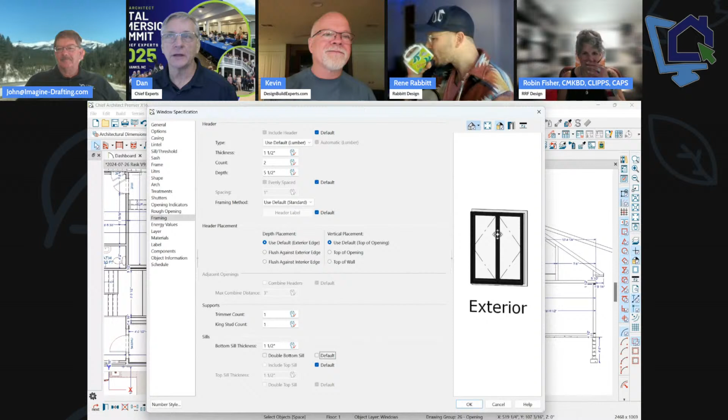So again, click on the window and then open it. No, huh, they're talking about the bottom of the wall, not the window sill. Well, excuse me.

That one I don't think you can do. Can we? You can't, I don't think you can change it. You can do a double, but you can't make it one 2x8 and one 2x6. Well, hold on, yeah, they wanted the double sill plate to be a 2x6, and then the upper sill to be, that's right, 2x8 and a 2x6, with the 2x6 flush on the inside.

Okay, you'd have to just do a CAD drawing, right? If it were me, I would actually do it manually, probably with a furring wall. What would be the purpose of that? What's the use case of having that situation? Yeah, that would be a good question. That was Designer X who asked that question. Designer X, what's the use case for that?

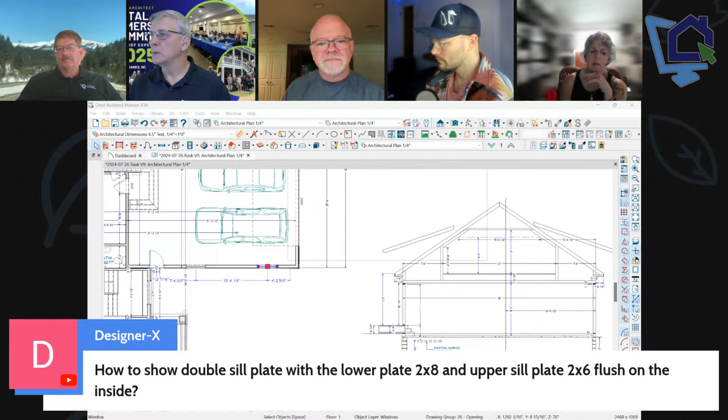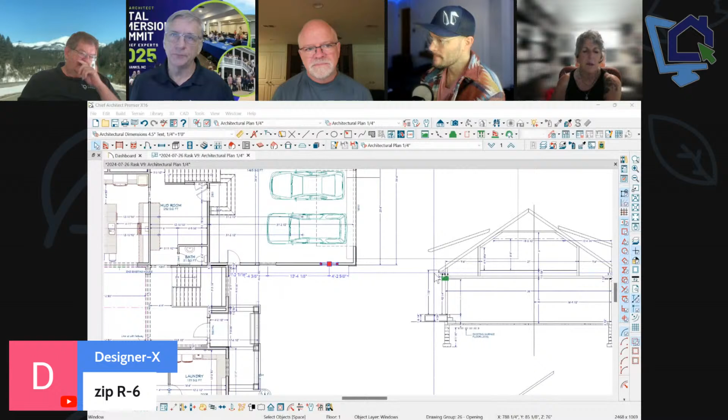Okay, explain to me what zip R6 is. I know R6 has got to be insulation, but what's a zip? That's a zip wall, zip sheathing. Oh, got it. What's the R6 for? That's the zip's insulation value, got to do with the foam. You can buy zip panels now with foam insulation already attached to them. Okay, so a zip panel that is an R6.

So he's looking to do a sill plate on the bottom. Well, let me just show you a way to do that, possibly. Could do a pony wall. Yeah, pony wall, that's what I'm thinking. Yeah, but if you just want to show that in your framing, you just click on a wall, open its dialog, and here's how I would do it, possibly, if I wanted to show it in 3D.

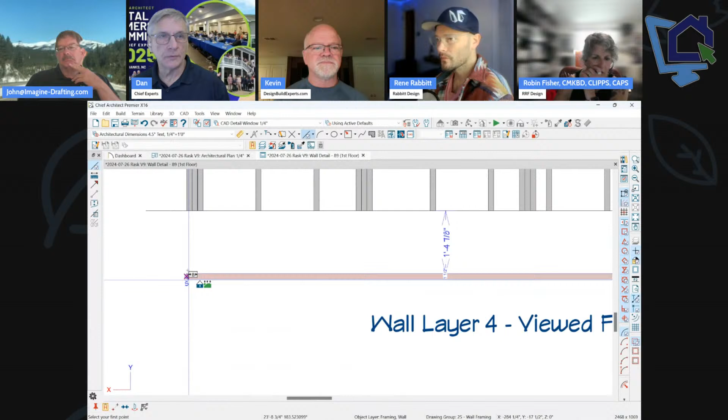I'm going to draw a line through here, and I'm going to trim out my studs here. Okay, I'm going to add another plate. Copy, oops, I missed my snap there. Again, this is the long way around, it's one wall at a time. You could click that bottom wall then and make it a 2x8.

Okay, just by changing it. And then I'm just going to extend my stud, delete that line and extend my studs back down. So it's a way to do it. It's manual, it's not super easy, but I'll set up a way to do this and could show it in a little bit if you want to.

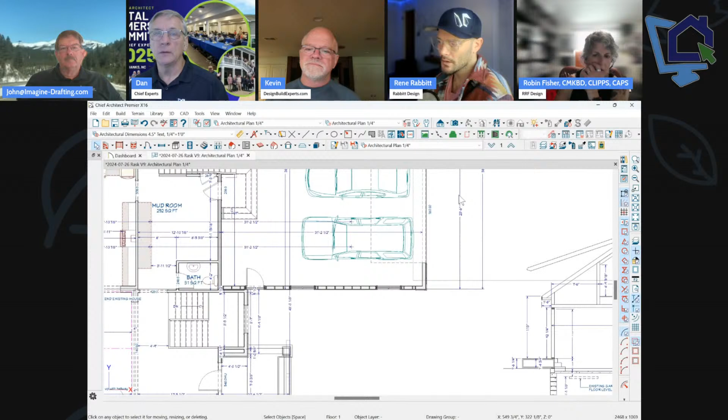But let's see if it worked. Yeah, so there's my plate. My plate's centered on the thing, so I would need to adjust that. I need to do the X, Y one way or the other. Once I calculate that, it wouldn't be hard to do, and I would have to move it over half of the distance of the plate.

I'm assuming you're wanting to do the plate because you want your zip panel with the sheathing to rest on the 2x8 and then nail at the bottom here. That's what I'm assuming. His last comment defines that, and that is correct, he wants the zip to sit on that plate. So that would be a way to do it, and then it would be part of your cross section when you add that to your sections through your model.

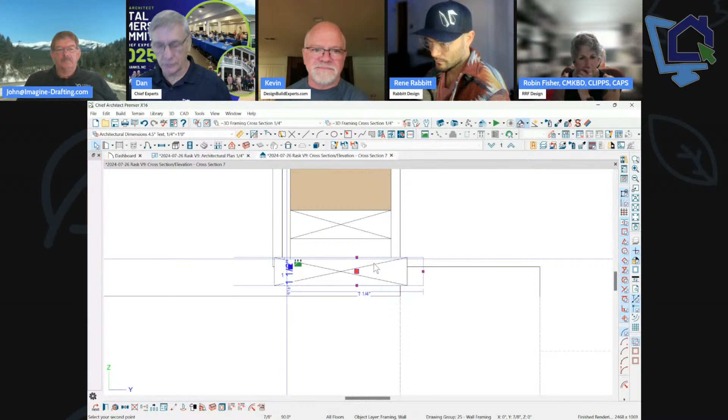So I got it right now. Probably move it right here too. So the nice thing about, I'll do it the other way, like this. So now that's going to be sticking on the right side, and your sheathing would rest on top of that. Anyway, okay Rene, have at it.

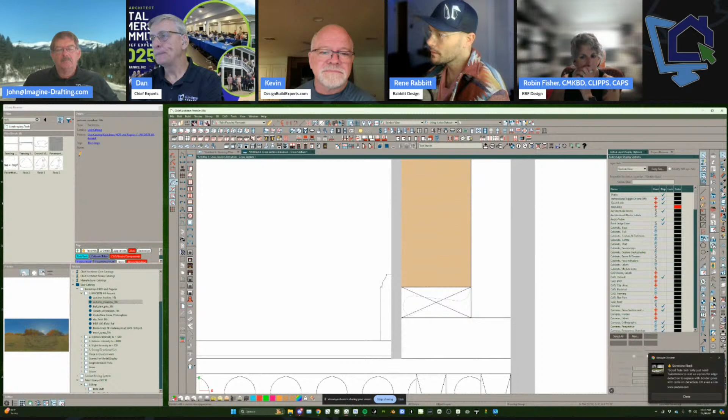Show us what your solution would be. I just have a pony wall here, and you got to get rid of the little insulation cross box because it's going to show that this is insulated. But the pony wall is only 1.5 inches tall, so all I did was add that 2 inches, assuming 2 inches of zip wall plus whatever this pony wall is. Now it didn't auto do a cross box, that might be because I didn't get it right on the money, but the model is actually built this way now. There you go, show the 3D of what the pony wall looks like.

Just show people how you made the pony wall for those that don't know how to do pony walls. So that's over one of these, I'm not sure which one I did it on.

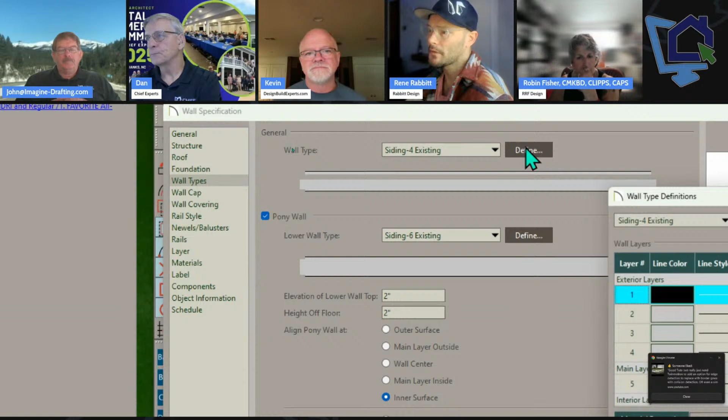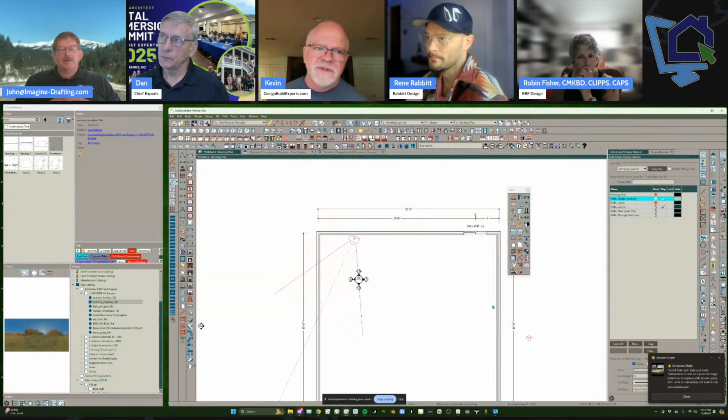So I opened up a wall, and in the wall types panel, designated it as a pony wall, then went in to define my upper wall. I redefined the upper wall and dropped in a 2-inch insulation air gap. Make that a framing wall, make that a frame - that's the zip wall. And then the wall below it is 2 inches wider, that's the 2x6. So that's a 2x6 wall plus a 2x4 wall on top with the zip sheathing, and they are the same thickness so they will align. So I just made it, and made it 1.5 inches tall.

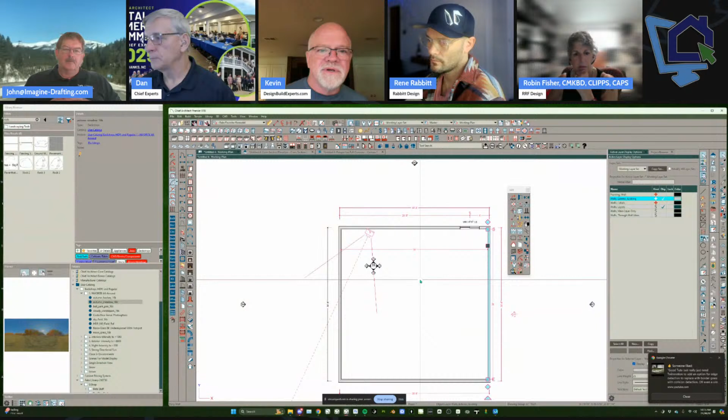Yeah, so I have another way that also makes use of a pony wall, but you could also simply make a pony wall where the bottom part of the wall was only 1.5 inches tall. Make your wall 8 inches wide, make the upper portion of the pony wall 8 inches wide, and the zip is the exterior layer of that. So you've created an 8-inch wide wall with the zip sitting on top of an 8-inch wide wall that is only 1.5 inches tall. That's what I did.

Same thing, except now you have that wall built that way for all pony walls. Rene, put it in your library and pull it from the library to draw it instead of from the wall tool. Done - you call it the zip R6 wall. Will that only save the top wall, won't save the bottom? Oh, do you still have to designate a pony wall? Oh no, you're right, it does come in as a pony wall - saves the whole thing.

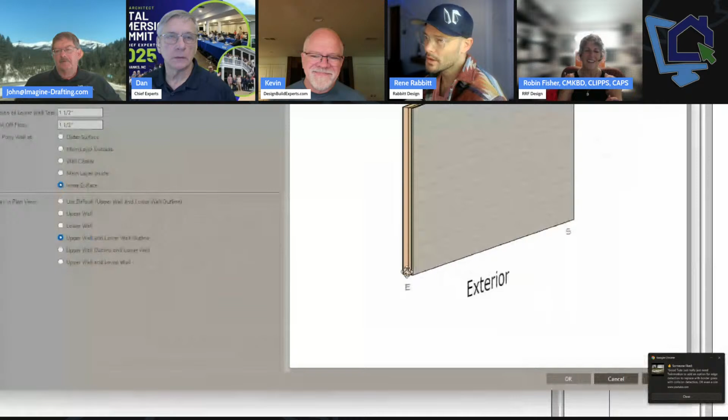Cool, there you go, look at that. You guys are amazing. It even shows it in this little preview, right? That's worth at least... how much is that worth? Man, that's worth a lot. You need to get those tricks at the summit. I have a question about this zip sheathing.

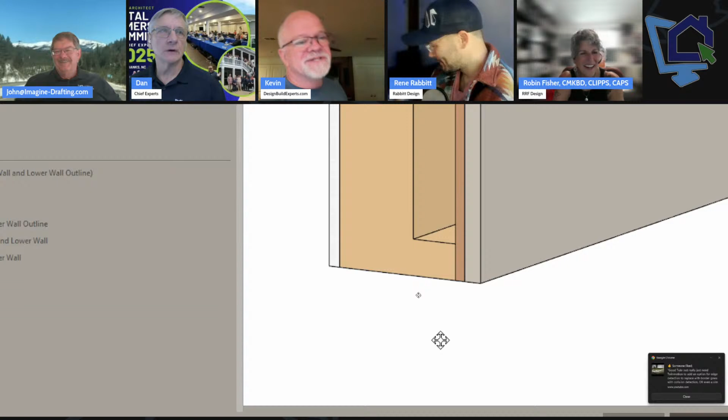You can show my screen here. So again, these panels are now coming with the insulation attached to the zip sheet. The zip sheathing is the coated OSB that's got the air barrier on it already, and then they have different thicknesses of the insulation.

I'd love to know how that compares in cost to put that on versus just a 2x4 wall, because I got a client that's asking for 2x4 framing with the R6 zip. I understand the benefits of the zip panel, as far as that a lot of times you get thermal bridging through the stud, and this breaks that. So I get the benefits of it, I'm just curious how the cost would compare.

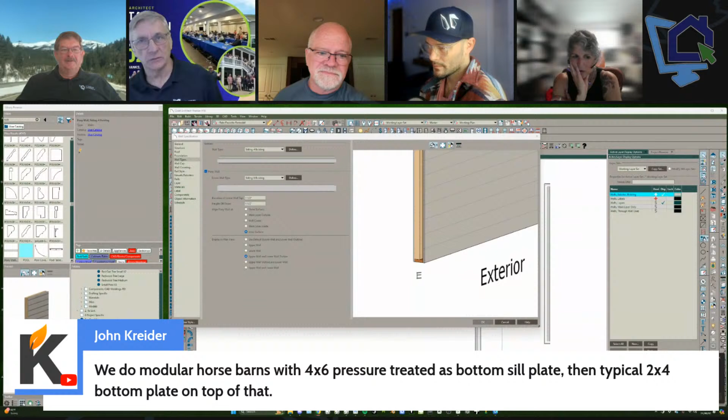I like that. I looked up some pricing on those sheets the other day. How much does a sheet cost? That's what I would like to know. I'd have to look, with the R6 on it. I found some price like $90 a sheet, something like that. And it seemed a little... But you have to compare that to the sheet of insulation, the sheet of OSB, the sheet of air barrier, everything total. Well, I was comparing it to 2x4 with the ZIP and the foam versus just 2x6 with OSB. That's kind of how I was looking at it.

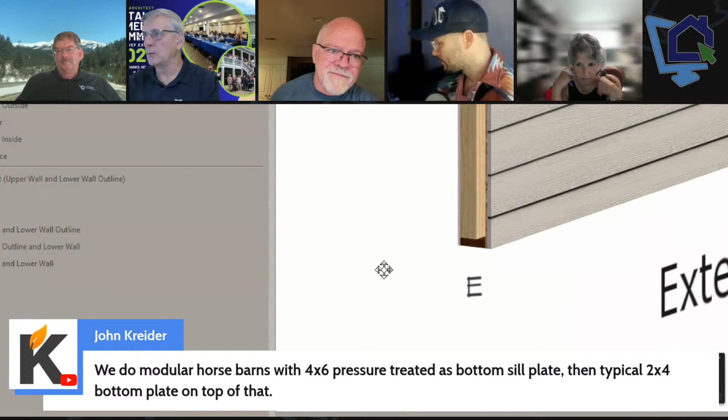So I understand what you're saying. Well, then you have the labor of installing each one of those things independently. Exactly. Erin makes a really good point. She says only one trip around the perimeter with the scaffolding. Right. Scaffolding is a nightmare putting up and down. It takes so much time to do it. Okay, so $87, so it's not too far off. Yeah. And to me, once I did it on the first house, it was a no-brainer. From that point on, everything was done that way.

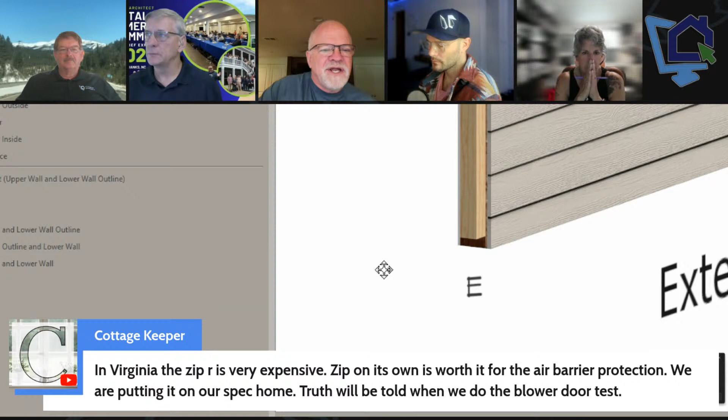So did you do the 2x4 with the R6 ZIP? No, that didn't exist. Oh, okay. I did it with the ZIP, but I was still doing the insulation on the interior. Now with the new energy codes, it makes complete sense, because we have to build up that exterior R value to the point that you've got to have a pretty thick wall to make that happen. Yeah. Cool.

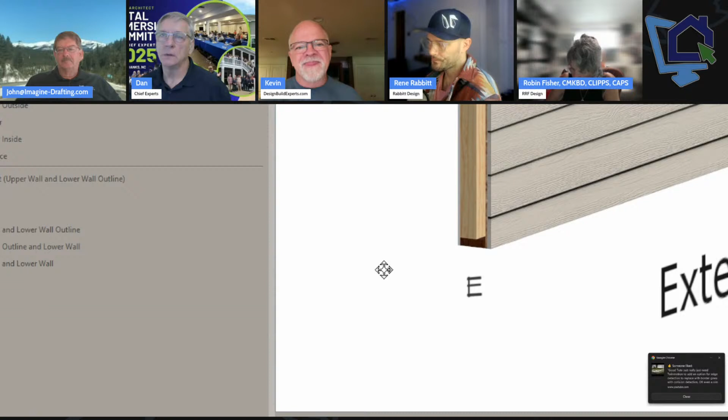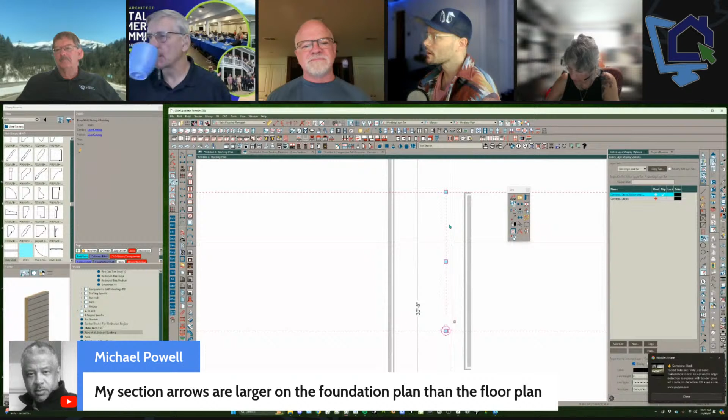Got a question here from Michael Powell in the comments. Section arrows are larger on the foundation plan than the floor plan. Why are my section arrows larger? That's going to be from the text style, I would assume, of the cross section. So this guy right here, camera's cross sections, foundation plan, camera's cross sections. It may also have to do with the text style.

You're just repeating me today, huh? Yeah, well, I revere you, so it's important. What is it? Imitation is the best form of flattery, right? That's right.

So you can override this. First thing to check is if your text style is different on your foundation plan than your other plan view, which is coming from your layer set. Your layer sets are designating that. And then the other thing is maybe you overrode the text style for this, in the plan display panel, I think.

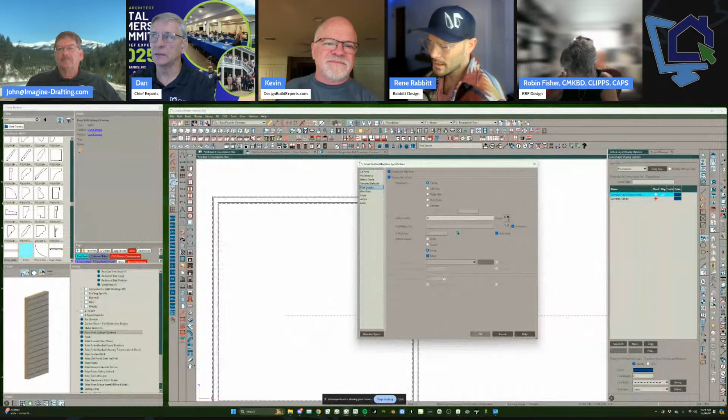I'm using the same plan view for foundation and the other elevations. If you're using different plan views, that could change the text style. If you overrode it, it would be overwritten in every layer set. Somebody said that earlier. Okay, children.

All right, what else you got? Oh my goodness. Margaret's wondering if we finished going over the X16 stuff. No, we haven't. We still have like, I don't know, 15 more to go. At the rate we were going, we could be going the rest of the year. Yeah, we'll do the X16s till the X17s come out. Well, let me review where we were at with that, since I'm the one that does the scheduling, and then we'll decide what else to do on that.

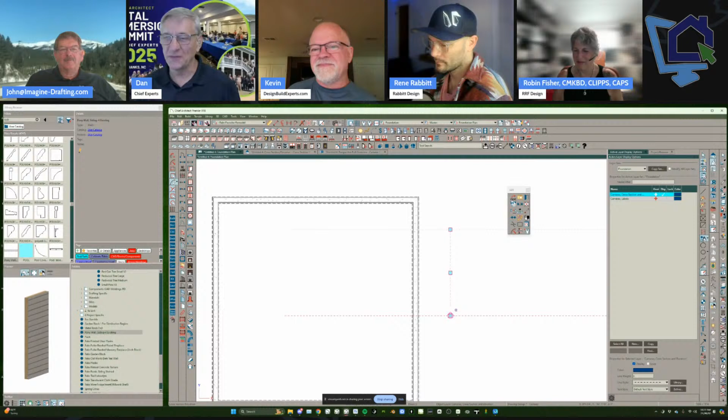But the problem was, when you guys were gone, we went off on a really long tangent. That's what I heard. We dove into rendering really good. It was great. Didn't have John there to cut us off.

I got a question. You guys chime in anytime if someone asks questions, but let me throw out a topic here. How many of you do this sort of stuff before you model your building? Actually draw the cross section before you try to model. It's a lot easier to do that. I've done it. Oh, can you show my screen, John? I got you. Oh, you're showing your screen. Yeah, thanks.

So I do that when I'm doing remodels because I have to. It's the only way to get your dimensions correct. Yeah, and how many people on the call do this, where they actually just use the CAD tools and you're just drawing a 2D CAD drawing of what it is you want to model? I do this a lot on my projects because it's the easiest way. Why do you do this? So I know what to model.

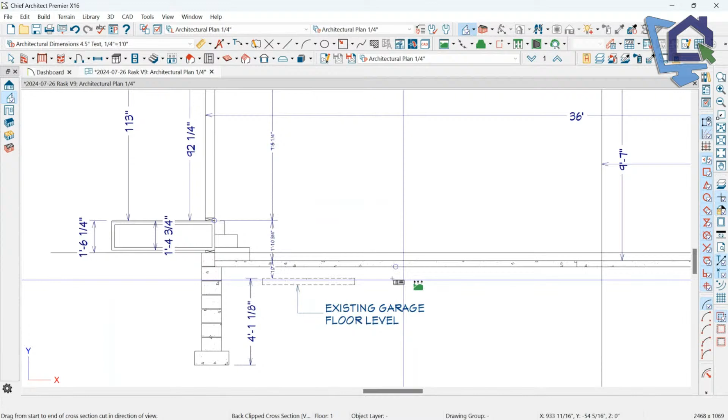Okay, so when I do this, here's my zero floor height right here. So I know exactly what to put my floor height at. I know where my stem wall height is at. I know what my ceiling height should be. I know where my fascia height should be for my roof. I know how much headroom. It takes all the guesswork out of messing around with 3D modeling to try to get everything the way you want it.

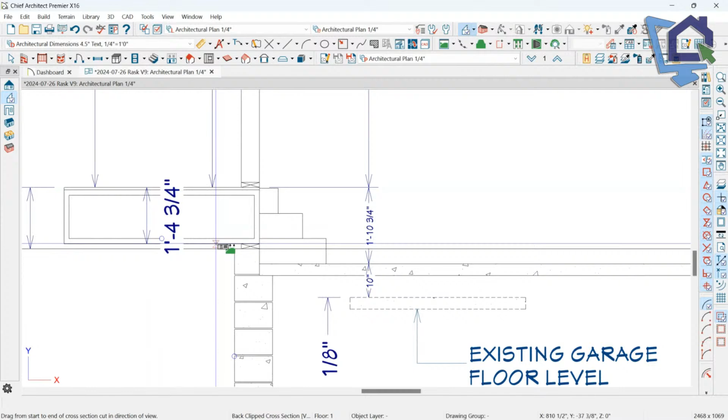Why wouldn't you just be plugging that into your floor defaults? Into what? Your floor defaults. Because I don't know what it needs to be to plug in. How do I know I need 1 foot 10 3/4 inches from zero to the top of the concrete? Well, where are you getting this from? That number would come from my floor joist, my truss thickness, sill plate, the height of the concrete block or the foundation walls.

Are we talking new construction or remodel? Well, this is new construction. They're basically removing the old house. So you're mapping it out essentially. Yeah, pretty much. You're not doing it for the whole house, you're doing it to get the critical measurements. Yeah, and once I get all my critical dimensions in place, I will then pull my cross sections through my model, because I can add the framing to this model super easy. It just really works for me. I've done this for years, always when I'm trying to do a remodel.

I'm with Ethan on this. Why not just model it? I also don't know what to model. How do I know that this height here needs to be what it needs to be when I need 113 inch? Or how do I know what my fascia height is?

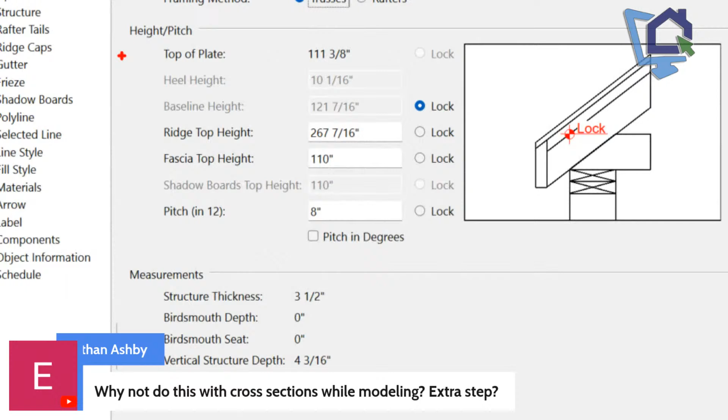Although I will say one thing they added in X16, which is fabulous, is this one setting in the roof dialog that tells you your heel height. This is so freaking cool. I was part of that thread on Chief Talk that was like a brute force thread. Like, give us this or we quit. Yeah, when I noticed that in X16, I almost jumped up and down in my chair, because that is such a valuable piece of information.

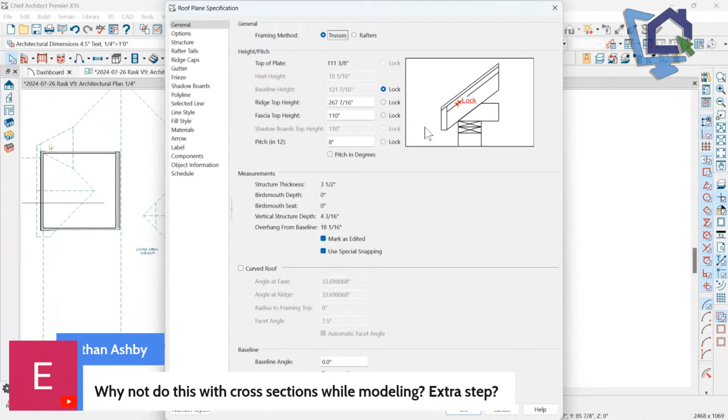Because I would always have to draw my cross section to figure out my fascia height when I needed a specific heel height. Now it's right there. So that will eliminate a lot of that guesswork, or me drawing that kind of stuff. So anyway, I just thought I'd throw this topic out there because it's something I've done for a long time, and it really works for me.

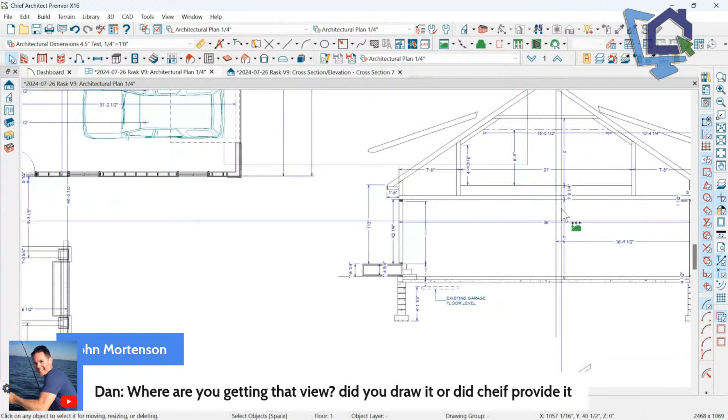So John, this is a CAD detail that Dan drew that he's showing there. Yeah, as I'm drawing this project, I'm doing this. And the other reason I'm doing this is because this is like the 4th time now that we've changed the garage and how they want to do it. Yes, they want living above. No, they want bonus above. No, they don't. Now they want to make a bigger dormer off the edge to do bedrooms up there. And so it's just part of the whole process of working your plan through. I'm up to version 9 in this particular layout for this project.

Interesting project too, because these people bought this house on a beautiful lot on a little lake here in the Twin Cities, and their house is about like this right now. This is existing. This is going to be new. They're going to live in this while I build this, and then they're going to live in this while they tear this down and build this. I'm designing around a critical wall element here. But anyway, regardless of that, fun project to design. We're just taking our time and getting it the way they want it. So it's just kind of fun.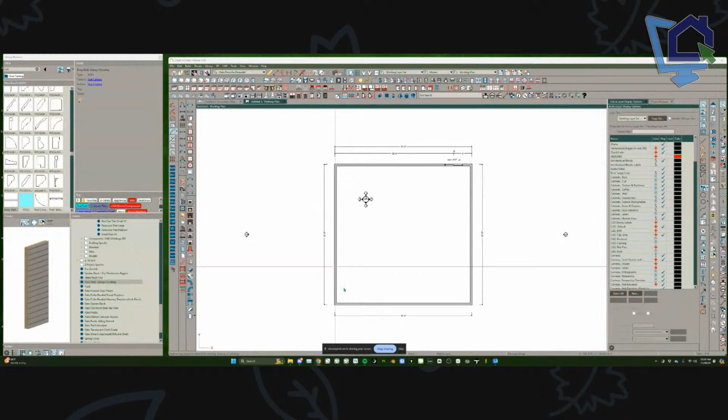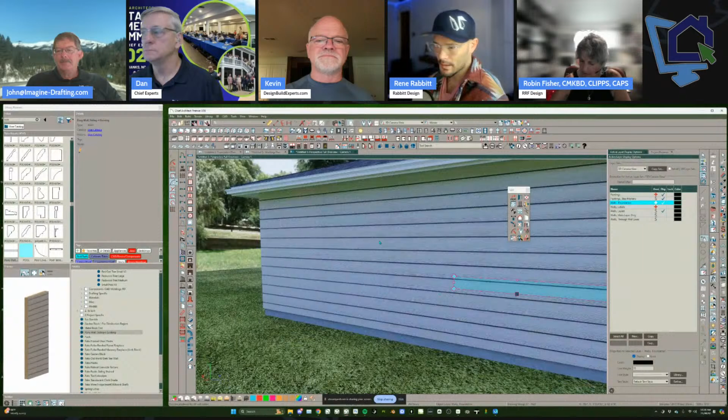Can I redress this? Let's see. I'm just curious in people's opinions. So here's what this would be, and we could stick our faces back on the screen if we want. To me, I think I'm maybe a little unique in that I do a lot of work in 3D. So maybe that's why this works really well for me. You had 1 foot 4.5. I have 4 walls in here for a number of different reasons. This is my template plan. It just comes with 4 walls established, which is establishing a building. So I know off the bat that this is here.

And part of that is that when I'm coming in a project and I need to build a garage. Let's just say I'm going to turn this room into a garage, because that's what you were showing, right? I think. Yeah. And then I already know that this is a 1 foot 9 setup. So I can come in here into this room and then bring this up 5 inches. So that's my first part. That turns off auto build foundation. Next part is you had a different heel height. So I'm just going to come in to build roof and change that heel height.

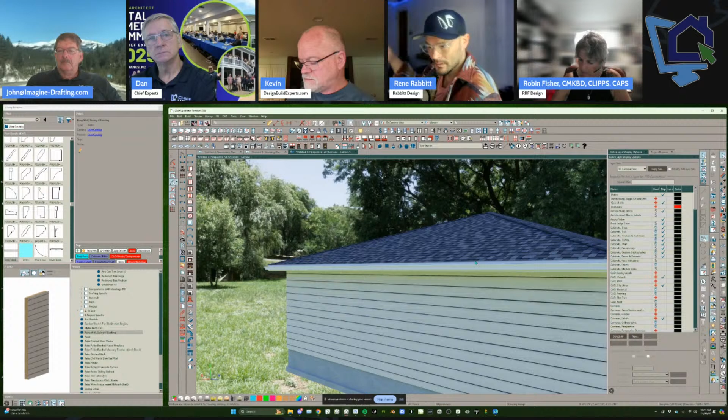Right. So this is very fast to me versus CAD seems a lot slower to me. So that's why I'm wondering what the difference is. I think it's just that I see it differently. Like I can see this, it's very clear. Your diagram's super clear and it's a great reference point, right? Yeah. But I might just save this by itself as my reference point. It's like, hey, if nothing else, come back to this.

I'd say probably about 50% of the types of projects I do that have, not difficult, but a lot of things going on, excuse my term there. It's just easier for me to organize my thought process if I put it on the screen and I have it right there. Gotcha. Totally understand that.

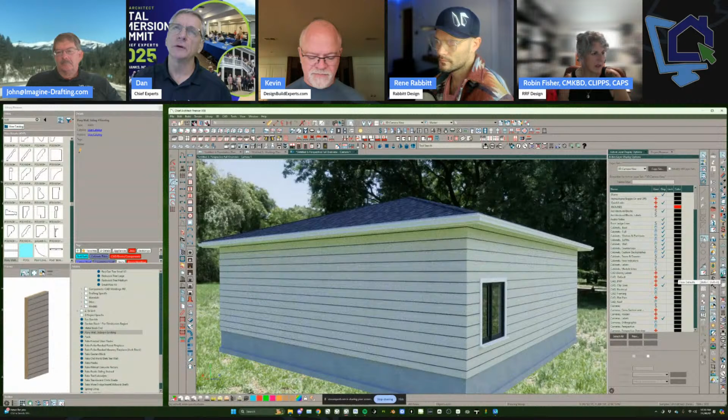I think reverting back to a conversation we were having earlier about the young lady that's struggling in your class because she can't stay focused. Sometimes I think some of that not being able to stay focused comes from total lack of understanding of what to draw. Not how to draw it, but what to draw. Absolutely. Right. And I run into that too. So I don't necessarily know what to draw. So if I take a little time and slow down and do what I do with these cross-section things, it helps me clarify what I need to draw. Well, and okay.

The issue is that there's a lot of really advanced builders on this call and in this room, and then there are people who are not really advanced. Like I'm not a builder, right? I don't do house construction, and it's easier for me to go through the exercise that you talk about, Dan, so that way I can actually understand what I'm creating. Yeah. Because I'm not really experienced in that.

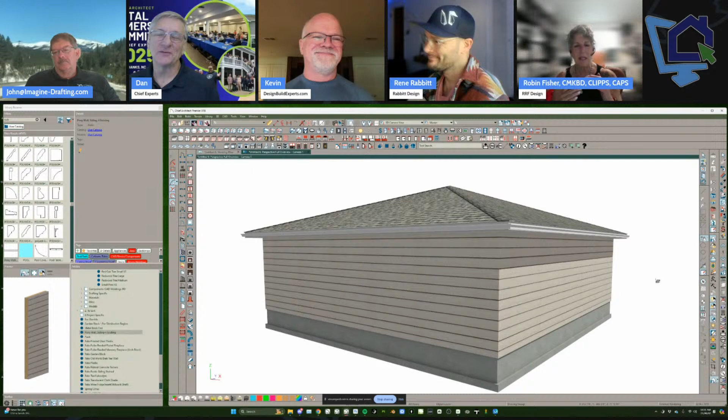Some of these people who are on the call and you guys in the room are really experienced, and it's easy for you, especially Rene. I mean, your brain works differently than the rest of us. We all know that, okay? I say that lovingly, but yes, his brain vibrates at a higher level than the rest of us. We already know this about Rene. But you haven't seen my outtake videos. No, I haven't. But you did actually admit that you were human recently, so that was good to know. Yeah, when I was choking on a recording.

Exactly. So sometimes doing a rough drawing is really good for people to do, and I really recommend it, especially for beginners, to sketch it out if you don't quite understand what's going to happen. Some people don't understand once you put it in 3D or get in the plan. You're like, I have no clue what I just drew, right? So I want to show a couple things real quick because I was kind of in that mode.

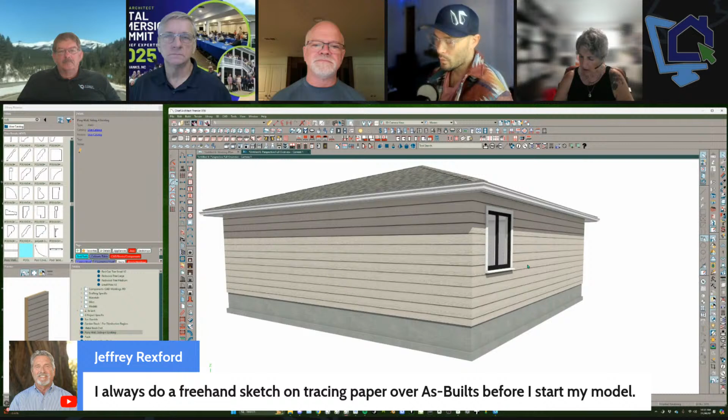If people are a little bit newer to this software, floor defaults drive all of your structural setups for every room on the entire floor. So if you're someone that is designating individual rooms' structure and heights, I would encourage you to instead change your floor defaults, and it will automatically change the heights of all the rooms on that floor. So if I have a floor where one room is 9-foot ceilings and the rest are 8-foot ceilings, make sure floor defaults are 8-foot ceilings, and then just change the one room to that 9-foot ceiling.

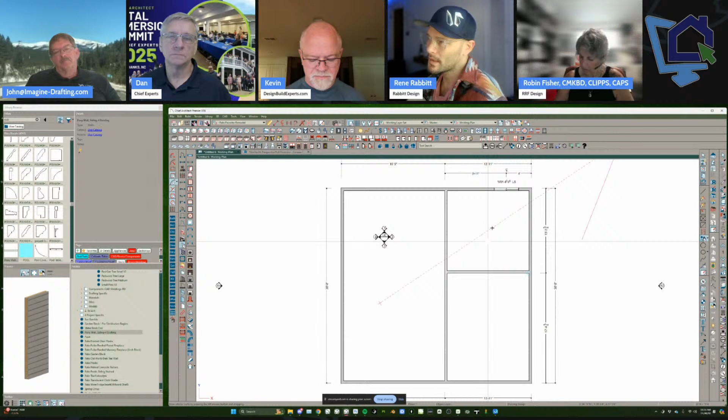Exactly. And if you do want to try working in 3D and give it a shot, I'm going to show you a workflow for this. Here I've created a couple dividing rooms, where these two rooms are going to be 8-foot ceilings, and this room is going to be 9-foot ceilings. Or actually, let's do the inverse. These two are going to be 9 foot. This one's going to be 8 foot. So I want my floor default to be 9 feet. I know my template plan has an 8-foot ceiling.

So I get into edit default settings, floors and rooms, and it shows me floor levels. And then here's my first floor defaults. This dialog looks a lot like the structure panel on a room dialog box. Yep, it's the same panel. And here's where I can just hit +12, and that will get me my 9-foot ceiling. Instead of this, I'm going to show you another way in 3D.

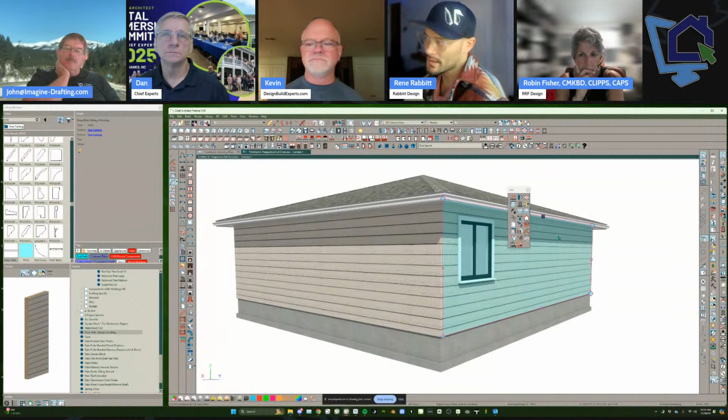I can click on this. This selects the wall. If I hit tab or enter, it now selects what's called the exterior room. It's going to give you this edit handle here, and down at the bottom it should give you another edit handle. That's just for the floor below.

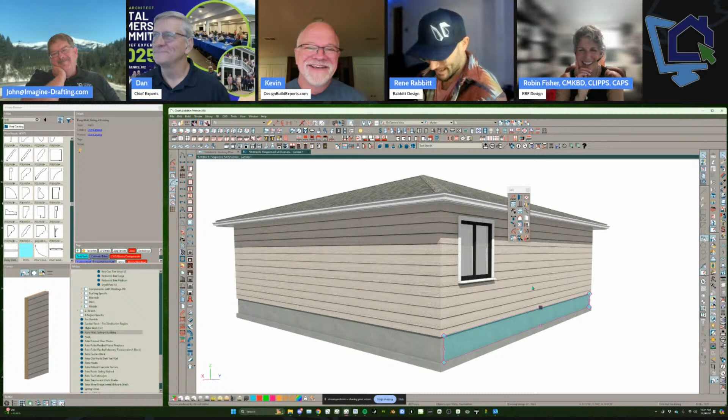Oh, excuse me. There's a spider right in front of my screen. It's going to land right on my keyboard. Oh, he's going back up. Okay. See you later. You didn't think about taking him outside, huh?

If I tab through this and drag this edit handle up, you're going to notice the entire structure looks like it's moving up. It is. It's changing the floor default. Right. So very quickly, while I'm dragging this cursor up, I can hit tab or enter and put in 12 inches. I've now changed the entire floor default for this floor to 9 feet. We can confirm it. Do you have the ability to hold the roof in place at the same time? It's just auto building off of that new plate height.

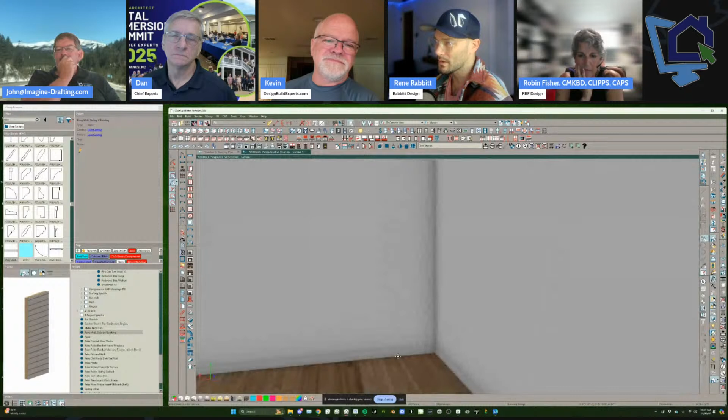So there we go. Now I got a new 9-foot ceiling plate height. And then I can go into that one particular room that I wanted different, and I could do the same thing. I could come into this room, tab into it, drag it down 12 inches. And now that particular room has an 8-foot ceiling height. The rest have 9 foot.

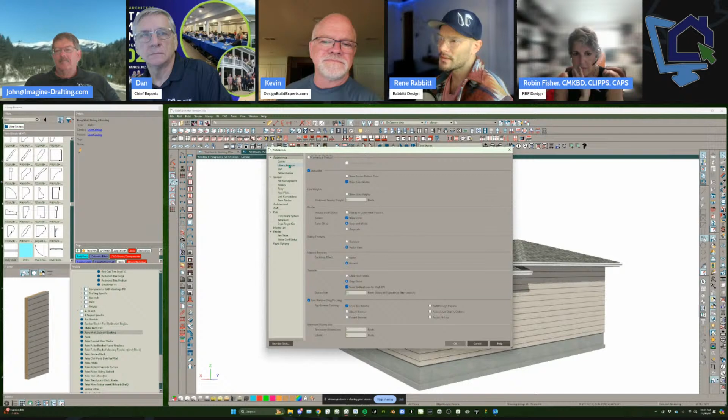And note that he wasn't changing a wall. It was the room. So you have to make sure you can see that box all the way around. Yeah, exactly, because you don't want to mess with the wall. By default, in your preferences, let's see, where is it? Architectural. By default, select room before wall in 3D is unchecked. I used to prefer it that way. That used to always come in checked if you would change the ceiling height. Or if you tried to pull a wall up, it would change the ceiling height in your plan.

Did they change that in their default? Or maybe not. Maybe it is checked by default. It might. I don't think I've been changing that anymore. Because every time I would reset my preferences for a new version, I would go change that one right away. So I think they've changed that now, to where it's unchecked by default. I think so. I think there were a few versions where it was always checked, and people were getting confused because they thought they were pulling a wall up or down, and you changed the whole room.

And I'm going to show one more thing here. In that structure panel in this room, I want you to notice that the wrench icon here doesn't have this little check mark next to it. Right. That's indicating that we're no longer following the floor default. If you didn't know, this is good information. That's huge to know.

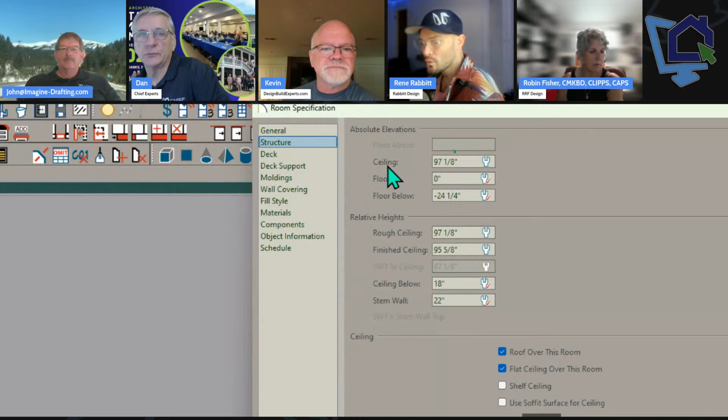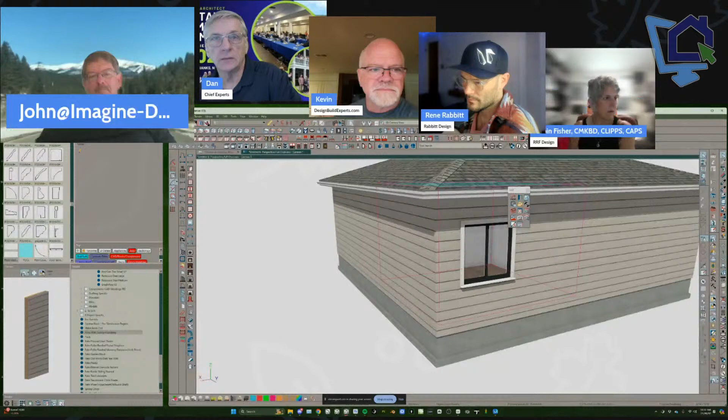Yeah. If you wanted to, you could select multiple rooms and hover over and just click this wrench icon, and it will put a check mark next to it and change your ceiling height back to the floor default. Exactly. That's really nice information to know, why those wrench icons are there and why the little check mark is there. I don't think a lot of people understand that. But yeah, if it's checked, that is the default setting for that particular item.

It's also a good way to fix multiple rooms where you know you've got an issue with ceiling heights, and you just want to make sure, what did I do? Why is it off? Rene, can you bring that thing back up you just had open and change one of the rooms? Add a few more rooms, and then change the height in one of the rooms. Use that little multi-select thing, John, that you like all the time. Match properties. Show people how to use the match properties real quick. That's really a nice way.

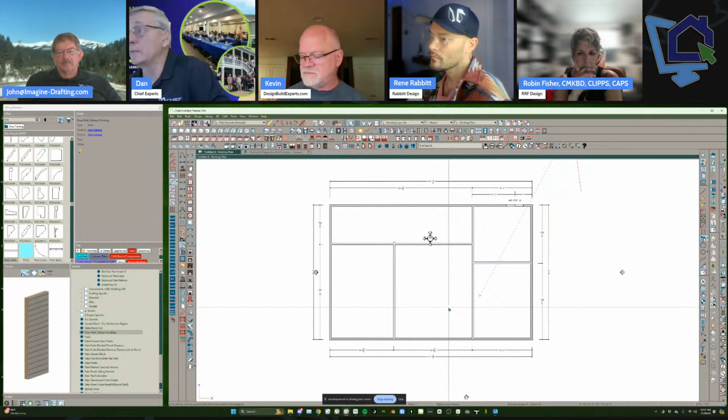If you've got a lot of stuff going on in your plan and you want to check all your floor and ceiling heights or just your floor heights, the match properties function is amazing. Especially if you have like 3 rooms that are one height and 3 rooms that are a different height. Yeah. So I have 2 rooms that are not. I'm going to put some labels on these things. Actually, we'll just put labels on all of them because my labels show up. So there we go. I got a couple rooms that have 9 foot, a couple rooms that have 8 foot.

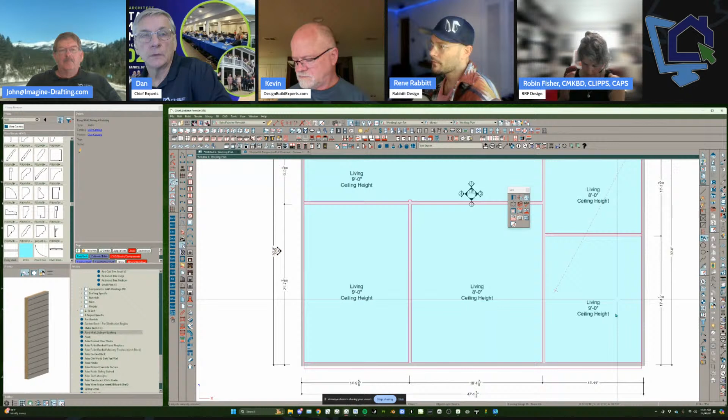If I select this one with 9 foot... No, hold on. Now, if this doesn't get people asking how'd you do that, I'll be really surprised. That's in my template. Yes. It takes a little macro for that. All right. Then I'm going to use the match properties tool.

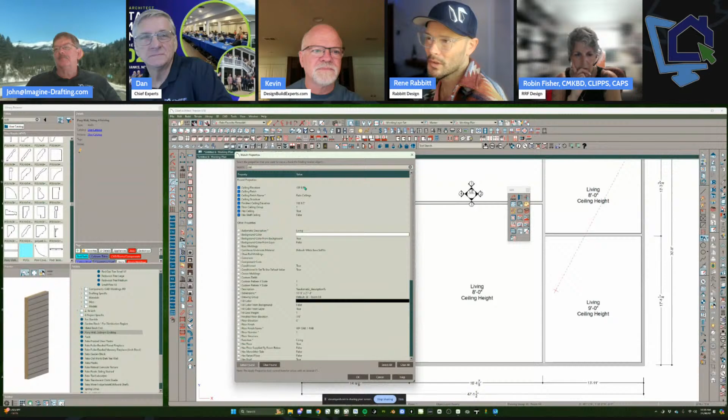That was this guy right here. The little yellow dot icon. And then I can just type in a search. There's a couple clever things that Chief does. You could just click on select found, and that will select anything that was found in your search term. So in this case, I'm looking for anything that has the ceiling elevation.

Press OK, and now it highlights with the color you've selected, highlighting objects or rooms matching that property. Next you can use the apply properties tool, which applies those properties you searched for. I could hover over these rooms, click, and okay, see that it applied to this room. Now it's a 9-foot ceiling height.

I still have that tool enabled, you can see my mouse cursor's changed. Same thing, I could draw a marquee over here, or just click in the room. There we go. It's funny, it doesn't have any kind of visual indicator that you're doing anything with that click.

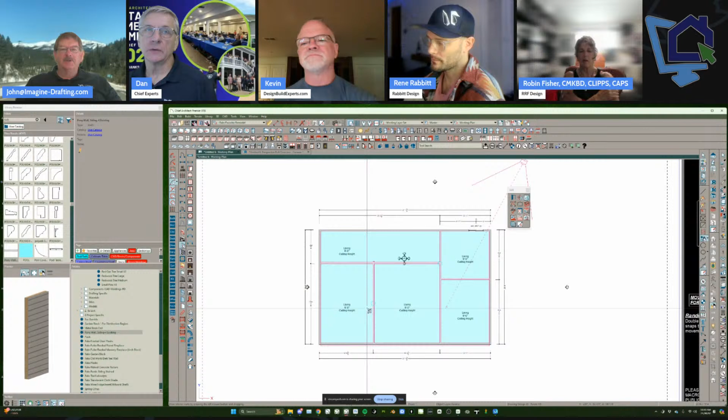It's hard to click in small rooms sometimes, so you really have to zoom in on those rooms. Sometimes you'll click in it and it will make the change but won't change the color. If you keep clicking and nothing's happening, just go back out and do the match properties again, and if it took, it'll show it matched. So another way to think of those buttons: one is copy and one is paste. You always have to click the paste button, the match properties.

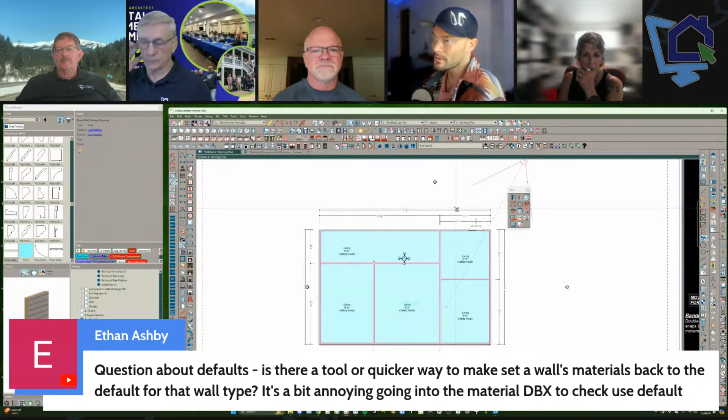Another thing I don't think people use that often, but I use all the time now, is the escape button—mine's remapped—where you can cycle back through the previous tools you used, and cycle forward through tools you used. So I could cycle back through until I get to my wall tool again. If I just need to drop a cabinet in real quick and then want to be back on my wall tool, I can cycle back to that. You see it just got enabled, I didn't need to hit any other hotkey, just cycle back and forth.

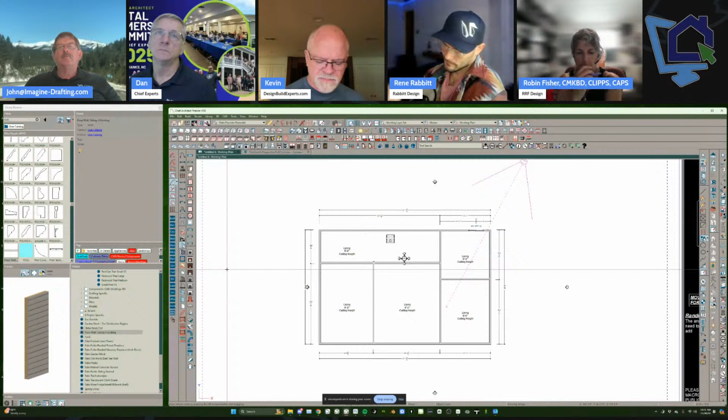I don't remember which way it is, but by default I think it's the space bar and the escape—one shuts everything down completely, the other takes you back a step. I don't remember which way it is. You changed your escape to do that, right, Rene? My middle mouse has a left and right click, so I click left, I click right, that gets me there.

So check out Ethan's question, he has a question about the defaults. I could do this one, I know how to do this now. Took me a while to figure this one out and remember it. Show my screen—yeah, you're up, thank you.

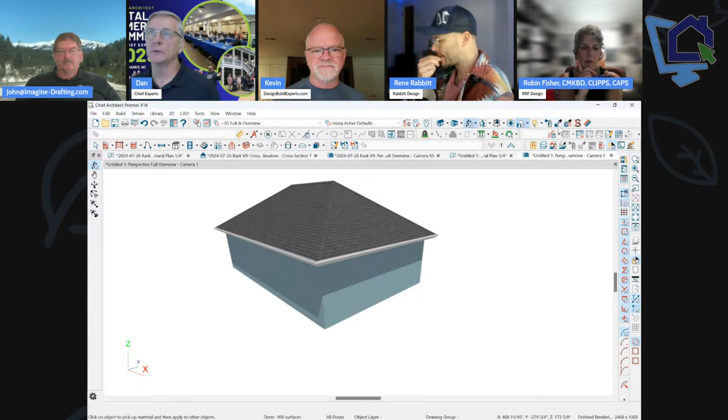Often people use the little painter icon here and paint different materials on their walls, basically skim coating your wall with a different material. Ethan wants to know how to set all his walls back to the default materials for the walls.

So what you're going to use is that same tool, the spray can tool. Now I have to remember if I remember this. You're going to go to plan materials—I need to get my icons down here. I thought I remembered this, let me go to plan materials, and choose default, use default. So I'm hitting the spray can and I want to use default material on my walls.

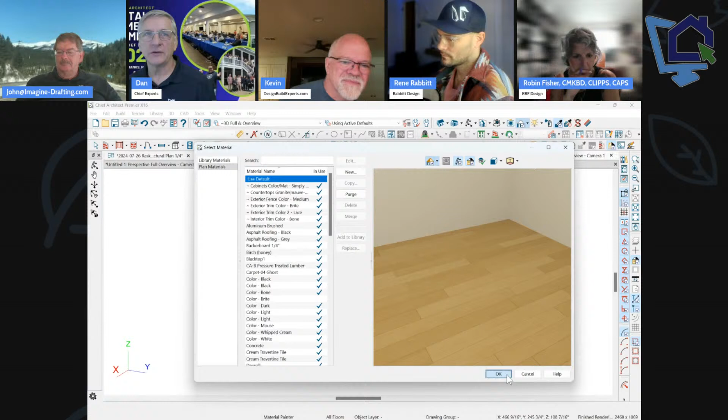I'm going to spray default over my whole plan by selecting the whole plan, so every wall in my plan that used to have a material sprayed over it is now set back to the default. So you have to use the spray can for that.

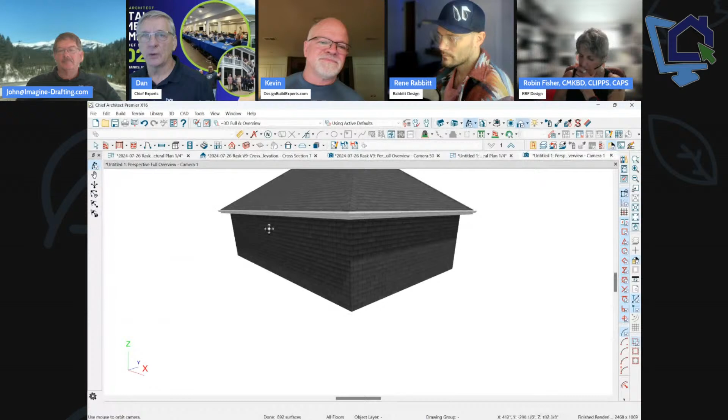Show that again, please. So you've gone through your plan, made a bunch of changes. You see all my walls now changed because I still had the whole plan thing checked. So I want to set my walls back to their default material.

The default material is the material that you set up when you go to wall types, hit define, and everything that's listed here is your default material, not the stuff you've sprayed on top of it. See the word default here? That's default layers now, which is another nice feature they added in X16, which I love.

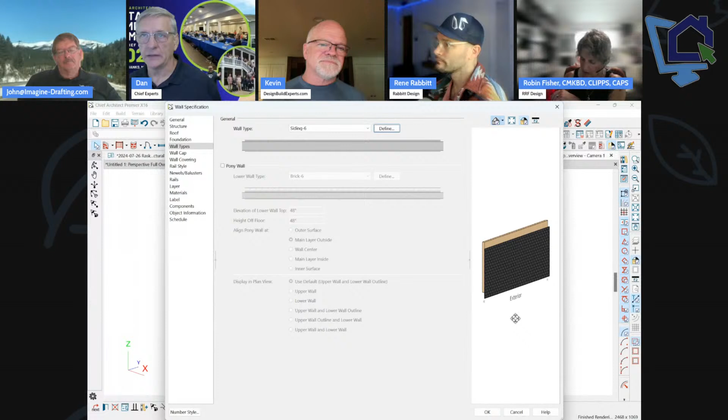So I want to set it back so it has the siding again, because if I change the wall type, it's still going to be shingles. No matter what, I could change it to brick, it's still going to be shingles. So hit the spray can, select default, use default, click OK, select plan, and then just click on the walls, and it'll put the default material back on the walls.

Just for anyone that's watching this, that use default setting works on everything. You don't have to change tools and go back to change other things. If you wanted to revert your roofing back to default, your fascia back to default, it will do all of that, as long as you're clicking on things.

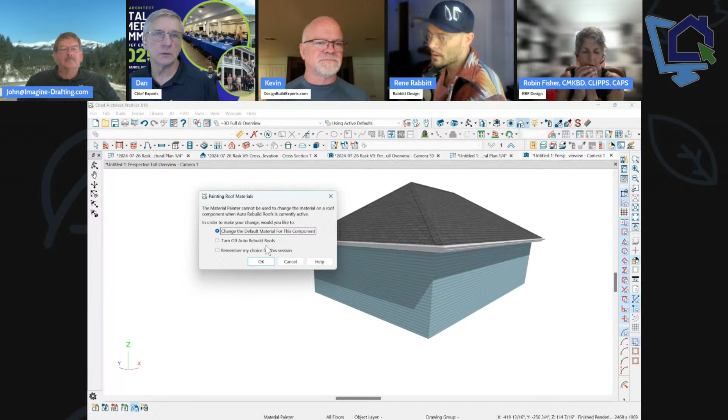Turn off this auto rebuild roofs. Oh, this is new. So I'm just going to put siding on the roof, change the default material for this component, turn off auto rebuild. Got it. All right, so I did all my roofs again, but I want to set those back to the default.

And change the same color thing, your walls too, just so we can show that it'll do both in one action.

Okay, so I'll paint my walls white. Oops, I painted everything because it all had the same material. Let me undo a couple times. That's fine. That's all you needed to do, because I had all the same materials and everything.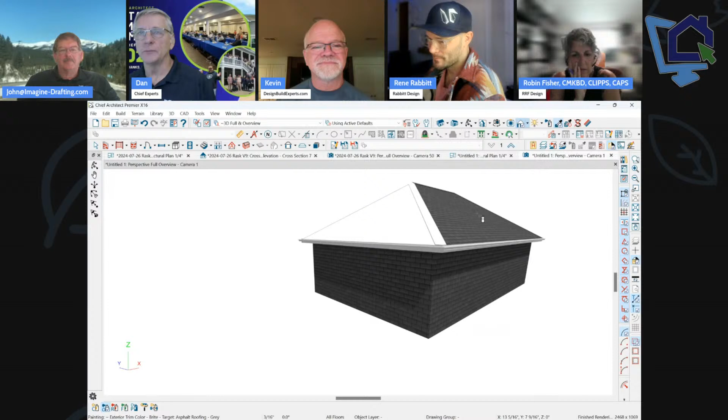So let me just do this again. I'm going to put shingles on my walls, and I'll just do it by object. Okay, and I'll put some white on my roof. Turn off auto build. Okay, so now I want to set everything back to the default.

So I'm going to click the spray can, hit use default, click OK, check my entire plan, click on the plan, click on the roof. Now I'm back to my default materials.

Wow, yeah, so that's really a nice feature. It's just so simple. It's like every time I do it, it's like, what did I do again? But the key is you have to use the spray can.

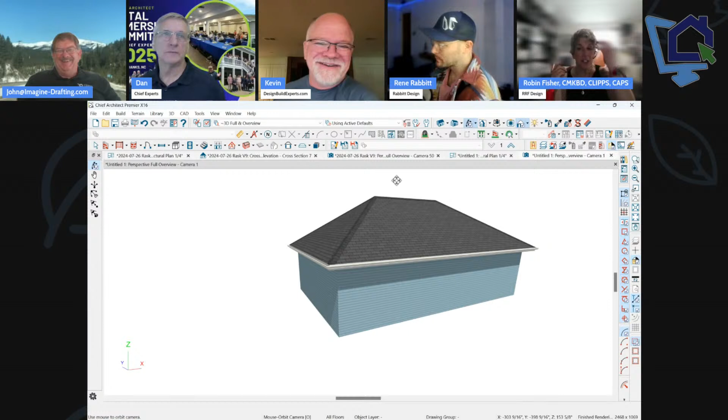I'm trying to remember, Dan, wasn't it two years ago you came back from Coeur d'Alene with that tip? Yeah, because I asked him that down there, and he showed me, and it's like, oh, that makes perfect sense. Remember, you were trying to show me how to do that, Dan? What was that, Kevin? If I remember right, there were three cartwheels involved. Something like that. Dan, you were trying to show me how to do that on a project I was working on, and thank you, now I know how to do it. So thank you. Good.

I want to show something on using default materials. If you are bringing anything in from like a SketchUp or something like that, you're pulling a model from somewhere else, and you're going to end up adding it to your library. So I've got a hood here, and by the way, I just redid all of my hoods in my catalog to use emitters, so that now that they use emitters, we have the... I don't know what just happened there.

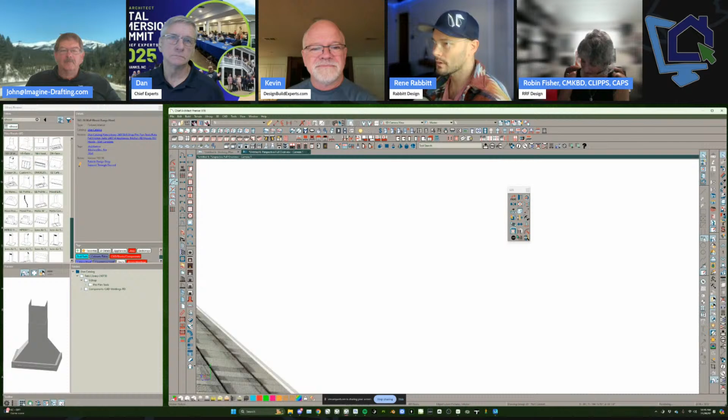What's an emitter? It is a class of material that produces light in Chief Architect. In X15 and before, all that did was kind of indicate that there was light there by creating a bloom effect. Now in X16, if something is painted with an emitter class, it will actually produce light. This is a hood. The hood is a fixture class. It's not an electrical class like your lighting would be, but it still has the on/off button to turn on and off.

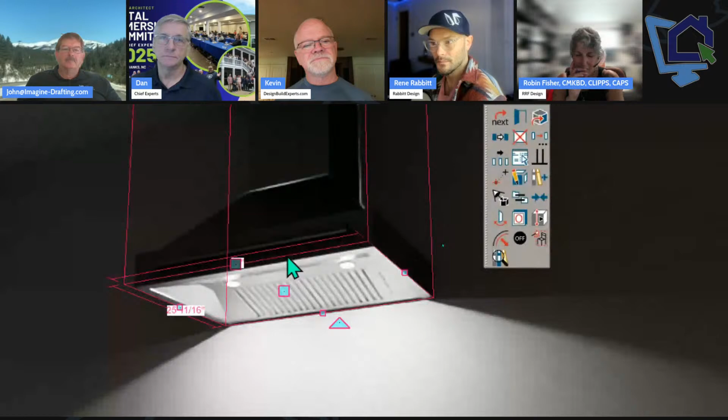And that's nice, because I used an emitter on the actual symbol itself. So now this does emit light, right?

Part of building this for my catalog is I want to set this up so that when I drag a hood into my plan, it's using the default material for appliances. That way this is not a static color. If my plan's default for appliances were white and I drag this in, it's going to be white when I bring this into the plan file.

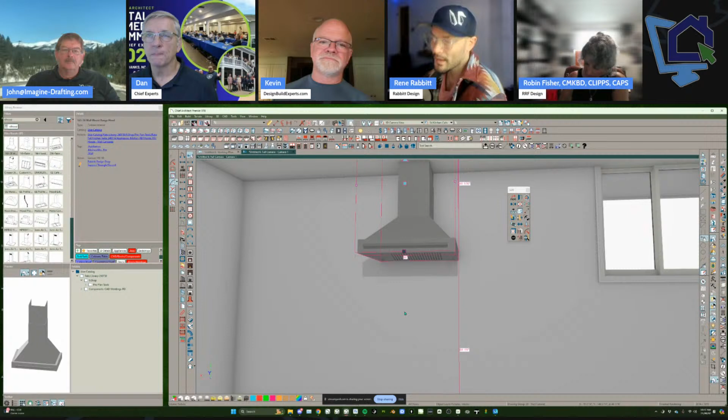I actually don't know where you set up default plans. I bet it's in 3D material, plan materials. Somewhere in here is... oh, it's got to be in default settings and materials. So there we go, default settings, materials.

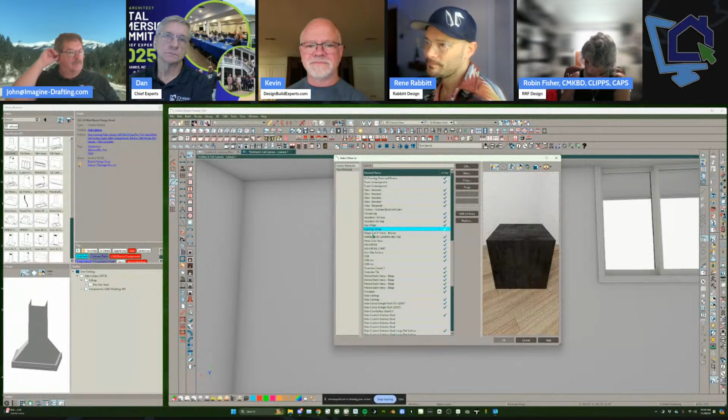If I were to come in here and say for appliances, I want this default material to be... just pick something kind of like, how about carpet? Shingles, there we go. So carpet is now my default for appliance materials. Look at that, it's going to change this hood when I bring it in from my library. So wow, any hood that I've established to use my default material for appliances is now going to be a carpeted hood.

Wow, that's nice. That's going to carry the fish smell for a while. It's going to be lovely. It'd go perfect with the shag carpet you'll put in the room, right?

We had a couple questions a while back talking about wanting to know about putting multiple rows of blocking in walls. You need Ethan on the call.

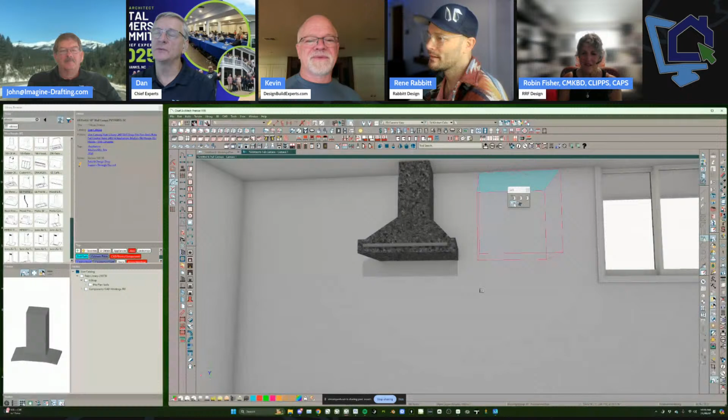As a default, any ideas when we do that in all the walls at once? I don't know, you have to draw it in. I'm sure. Wondering if we'd have to open it up. You can't create a wall with blocking automatically in it? No. Let's see if we got any. No, okay. Ethan, can you create a wall with blocking in it?

No, he's spent so many hours. He's got a project right now where he's modeling modular homes where everything has to be dialed in and perfect, and so he's spent a ton of time trying to develop around that. I think he's got a few tricks.

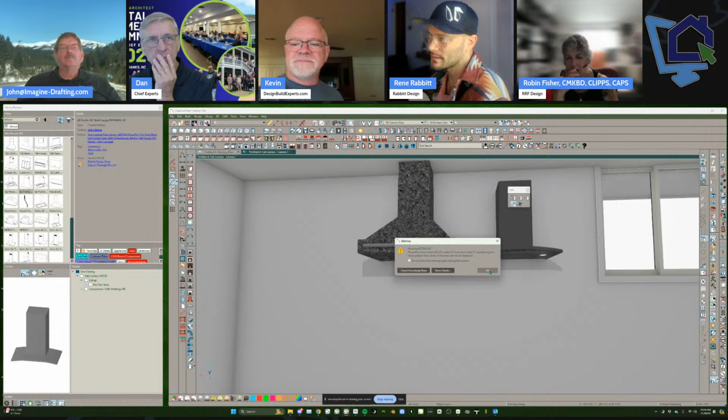What's he saying there about blocking? Let's see, there are some things that Chief needs to fix and add. Chief has a default setting for adding staggered blocking automatically in a wall, but it doesn't do it. That's just making it so the blocking is not in a row, it's staggered, but you're not going to get two rows of blocks. Exactly, I was just trying to get one to start out here.

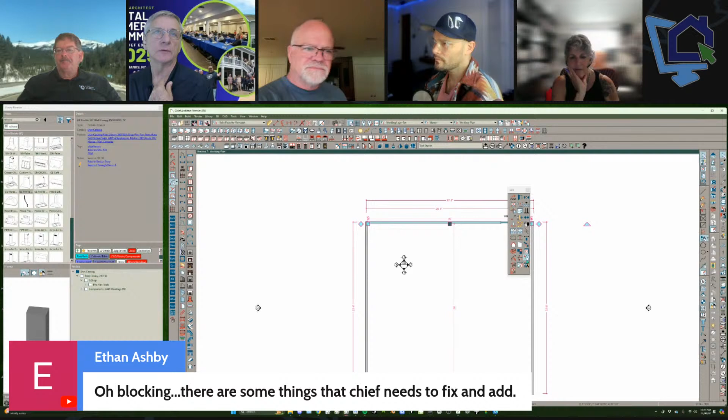So you can select one wall, build the framing for that one wall, and that's going to ask you to turn on things in that view, then you can open the wall detail for that wall. And then you can use a blocking tool—boy, I haven't had to do this—here's a blocking tool from the framing library, and just draw through a couple rows of blocks. But not automatically, so you'd have to do that on every wall.

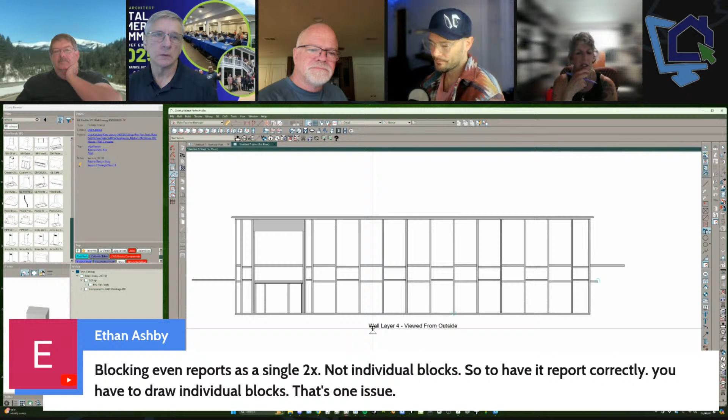And that's staggered, right? Yeah. Can you change it from being staggered? Can it go straight across? Yeah, I think that's in my settings somewhere, but you could just open these up, and the dialog box for that should show it somewhere here—inline blocking. There you go, got it.

Okay, cool, hey we're just about out of time here. We did have a question—somebody wants to do an individual, somebody was asking about doing an indoor pool, just something we can do in the future.

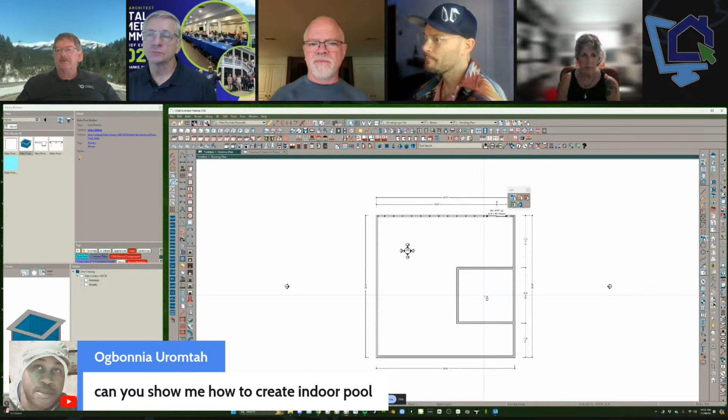We can, but if you go back a couple months, we did a show—it was me doing stuff about landscaping. If you watched that, I think you'd get the technique. It was last month, the beginning of last month. There was one about landscaping, setting terrain. I did a pool in that, which would be a good technique for your indoor pool.

Show off. Show. Now, does it start at 3 feet and go to 8, or is it all one level? You want a little staggered setup here? Yeah, we could do that.